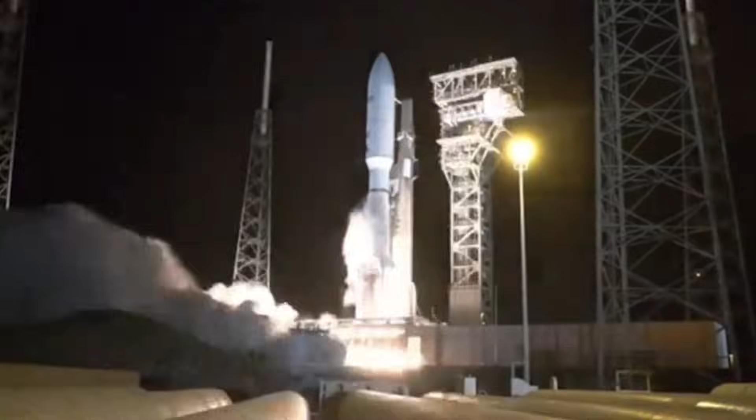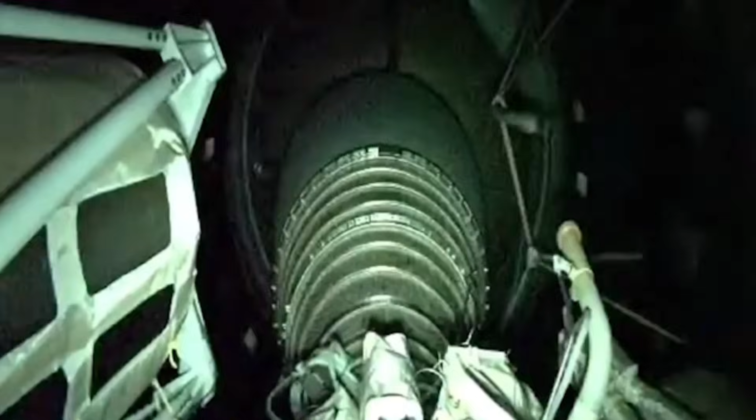Watch this rocket launch. That's an Atlas V, America's most reliable launch vehicle. It's carried Mars rovers, military satellites, and billion-dollar payloads into orbit. Now look closer. Look at the base. That engine, the one doing all the work, wasn't built in America.

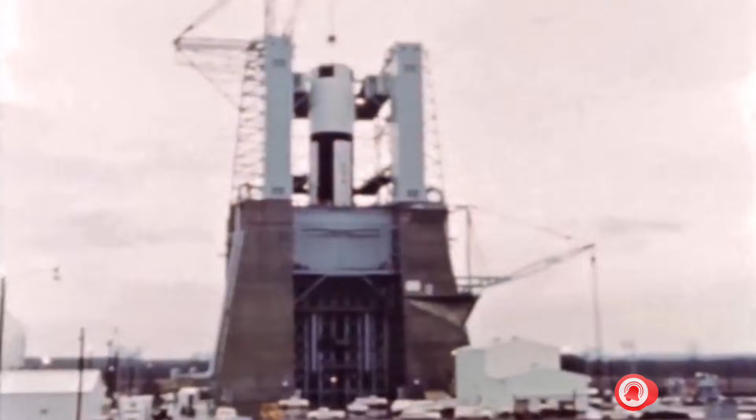It was built in Russia, the RD-180, designed by engineers who spent the Cold War trying to beat us to the moon. And now we buy them, not because Russian engines are cheaper, not because of some trade deal. We buy them because America, the nation that built the Saturn V, the nation that landed on the moon, forgot how to build rocket engines this powerful.

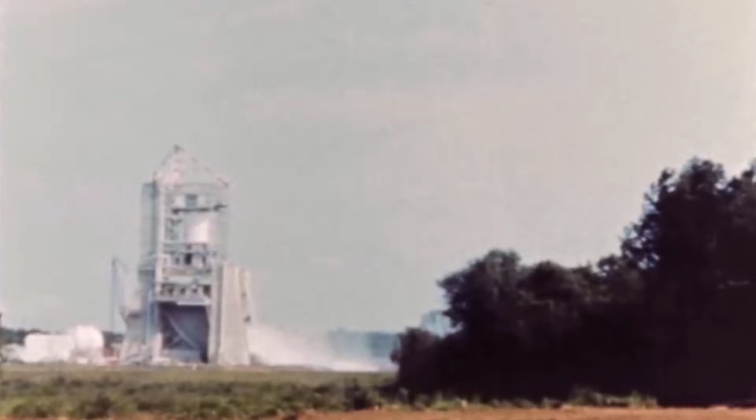The F-1 engine generated 1.5 million pounds of thrust. It flew 65 times without a single failure. It was the most reliable large rocket engine ever built. Today, 3 of them sit in museums.

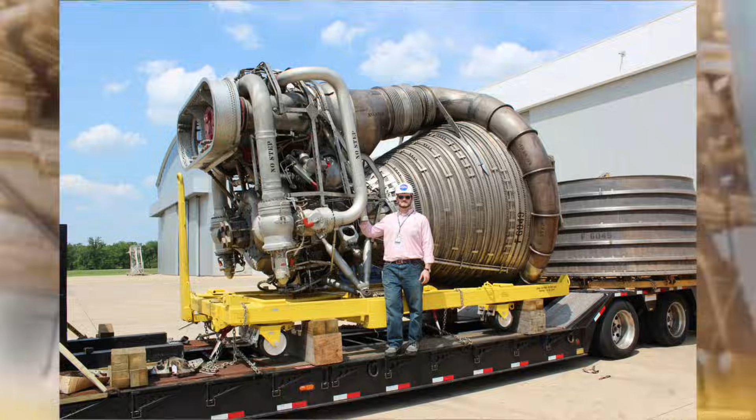We can't rebuild them. The RD-170 generates 1.77 million pounds of thrust. It's the most powerful liquid rocket engine ever fired, and it's still flying. Its descendants power American rockets right now as you watch this.

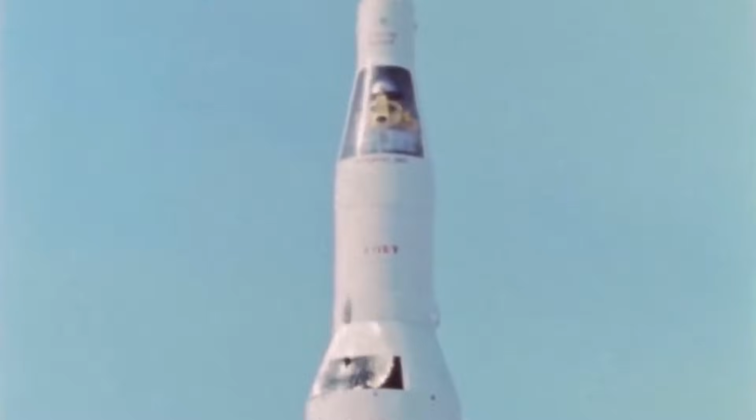Here's what should make you furious. We didn't lose this technology in a war. We didn't have it stolen. We just stopped. We let the engineers retire. We let the documents gather dust. We let the knowledge die. And when we needed powerful engines again, we had to call Moscow.

This is the story of how America built the greatest rocket engine in history, then forgot how it worked, and how our Cold War enemy kept building while we dismantled everything.

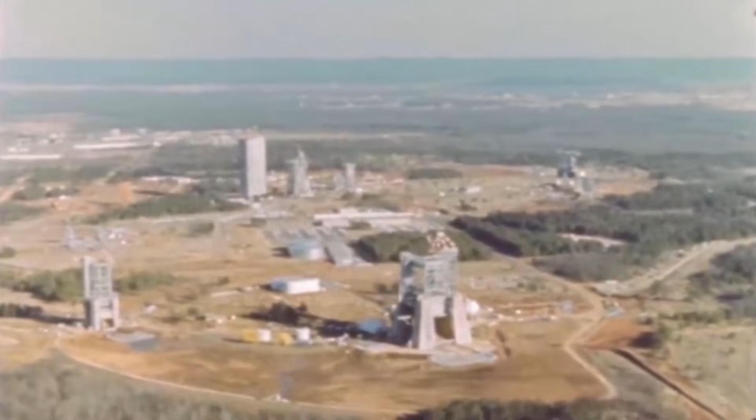To understand what we lost, you need to understand what the F-1 actually was. It wasn't just a rocket engine. It was an engineering achievement that pushed the absolute limits of 1960s technology and human intuition.

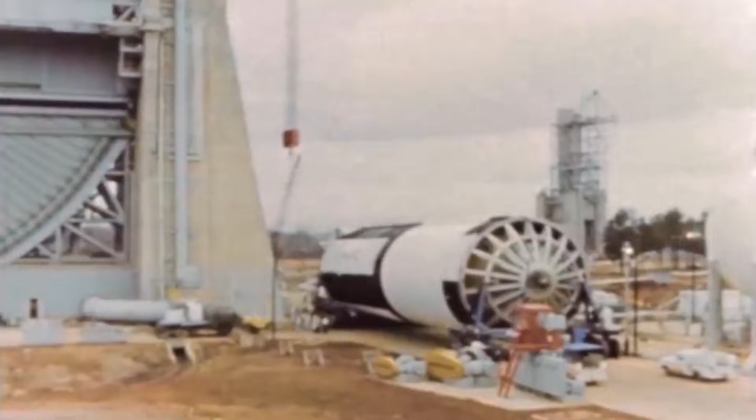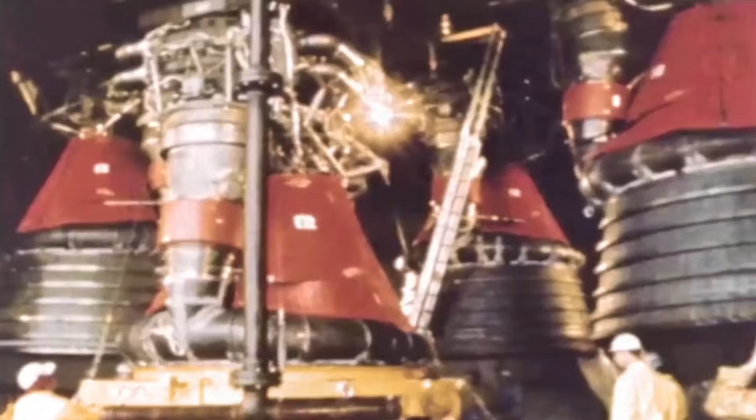1.5 million pounds of thrust per engine. 5 engines on the Saturn V first stage, generating 7.5 million pounds of combined thrust. Fuel consumption was 3 tons per second. That's a backyard swimming pool's worth of kerosene and liquid oxygen every 15 seconds, converted into controlled violence.

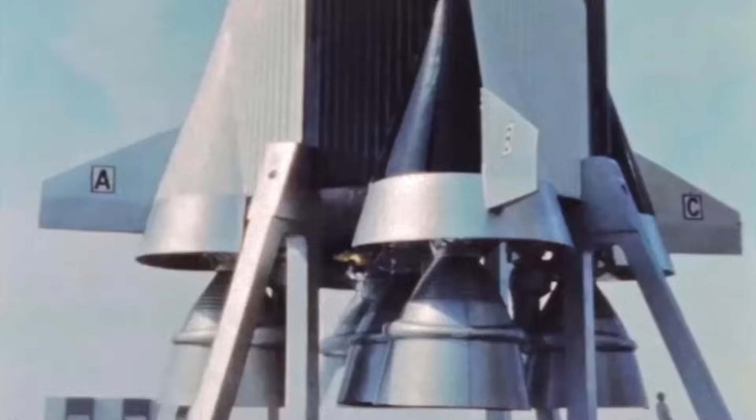But the numbers don't capture the real challenge. The problem that nearly killed the F-1 program was combustion instability. Inside the combustion chamber, at pressures exceeding 1,000 pounds per square inch, the burning propellant would oscillate at frequencies around 2,000 cycles per second. These oscillations would build on themselves, creating standing waves that could tear the engine apart in milliseconds. During early tests, combustion chambers literally exploded on the test stand.

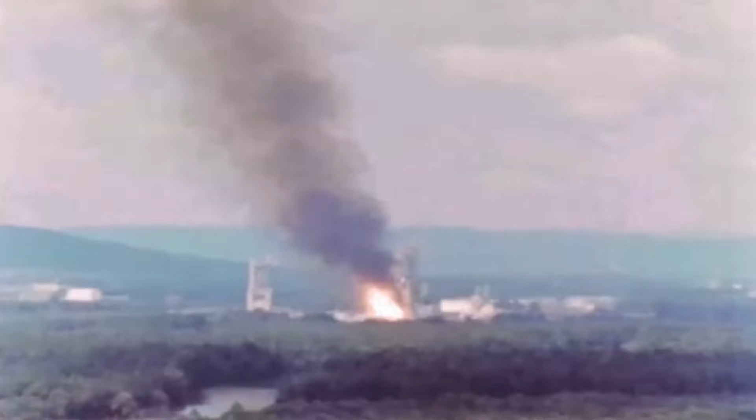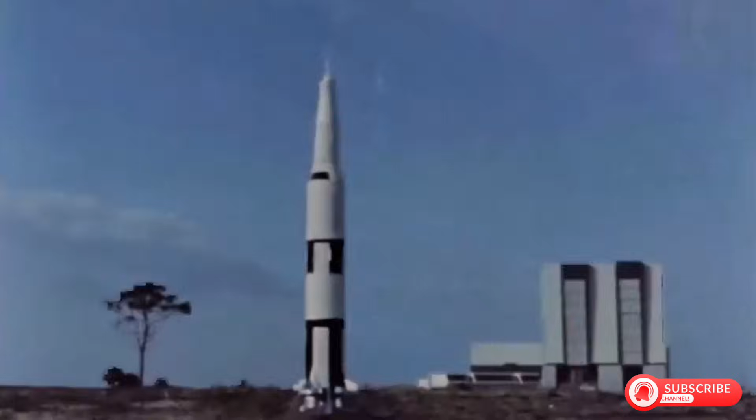Rocketdyne engineers spent years solving this problem, over 2,000 test firings. They tried different injector patterns, different chamber geometries, and different fuel mixture ratios. This wasn't elegant physics. This was brute force trial and error. They'd make a change, fire the engine, and see if it exploded. If it didn't explode, they'd try to understand why.

Eventually, they developed solutions, baffles in the injector face, specific hole patterns that disrupted the formation of standing waves. But here's the critical detail. Much of this knowledge was never fully documented.

Experienced technicians could diagnose combustion instability problems by sound alone. They could hear the frequency shifts and the harmonic patterns, and they'd know exactly what was wrong. No computer models, no simulation software, just intuition built over years of listening to engines scream. This was the black magic of rocket engineering. The F-1 worked not just because of good design, but because of accumulated human expertise that existed nowhere except in the minds of the people who built it.

Now, consider the Soviet answer. The RD-170, 1.77 million pounds of thrust, the most powerful liquid-fueled rocket engine ever built, and it's still flying today. Valentin Glushko designed it. While America was celebrating the moon landings, Glushko was solving the same combustion instability problems we had faced, but with a different approach.

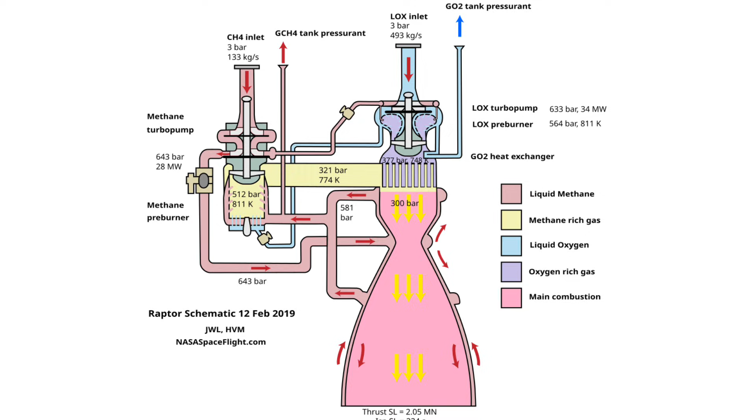Instead of one massive combustion chamber like the F-1, the RD-170 used 4 smaller chambers fed by a single turbopump. Smaller chambers meant shorter acoustic wavelengths, which made instabilities easier to control.

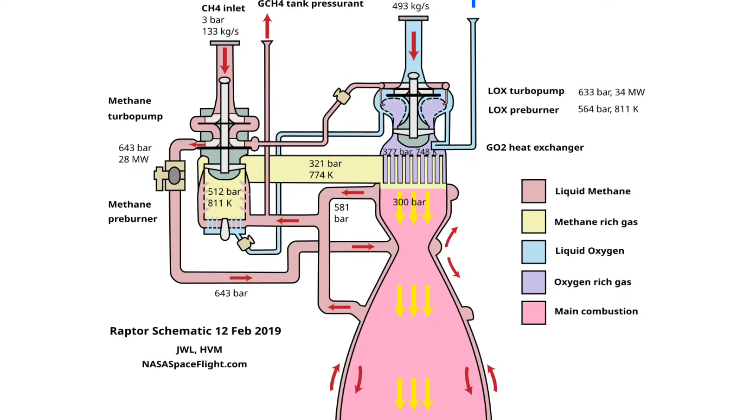But the real innovation was the thermodynamic cycle. The F-1 used a gas generator cycle. A small portion of the propellant gets burned in a separate chamber to drive the turbopump, then exhausted overboard. It's simple and reliable, but inefficient. Only about 65% of the propellant energy converts to thrust.

The RD-170 used staged combustion. All of the propellant flows through the turbopump. The fuel is burned oxygen-rich at extreme pressure to drive the turbine, then injected into the main combustion chamber where it burns again.

Nearly 99% of the propellant energy converts to thrust. It's thermodynamically elegant. It's also viciously difficult to build.

Staged combustion means the turbopump operates at pressures that would make the F-1 engineers weep. One seal failure, one crack in a weld, and superheated oxygen-rich gas finds its way where it shouldn't be. The result isn't a malfunction, it's a detonation.

American engineers tried to develop staged combustion engines in the 1960s. They kept failing. The metallurgy wasn't good enough. The welding techniques weren't precise enough. The seals leaked. So we stayed with gas generator cycles—reliable, proven, and less efficient.

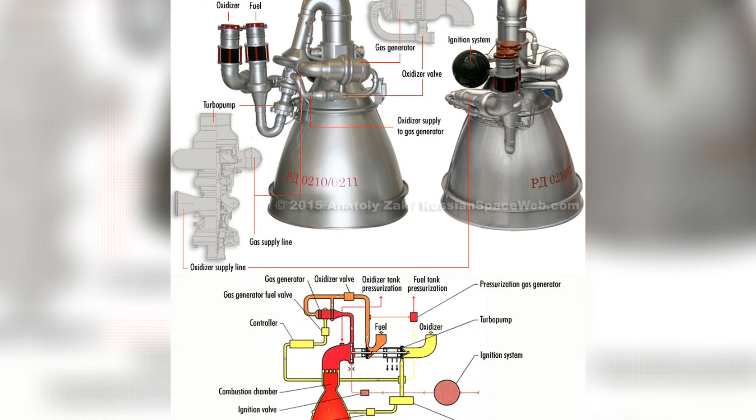The Soviets kept working on it. Their metallurgy improved. Their welding techniques improved. By the 1980s, they had solved problems we had given up on. The irony is profound. We thought we were ahead. We were solving the wrong problem.

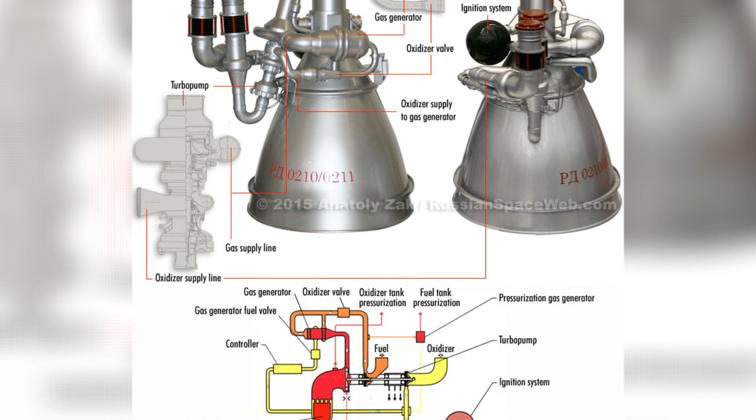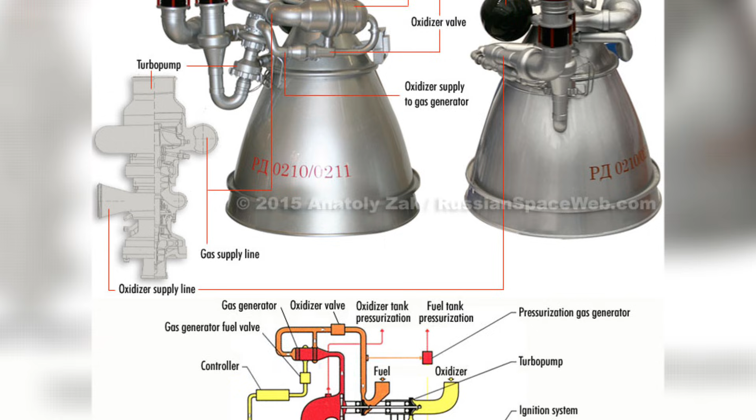The RD-170 first flew in 1985 on the Energia rocket, the Soviet Super Heavy launcher designed to compete with Saturn V. It was 20 years too late to win the moon race, but it proved something important. Soviet engineering hadn't just caught up. In some ways, it had surpassed us. But first, the F-1 had its moment of glory.

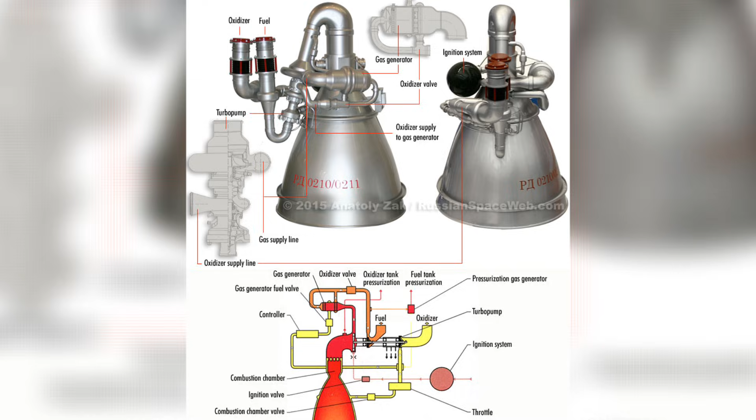July 16, 1969, 5 F-1 engines ignite beneath Apollo 11, 7.5 million pounds of thrust, lifting 6.2 million pounds of rocket. Neil Armstrong's heart rate at liftoff was 110 beats per minute. That's calm for a man sitting on top of a controlled explosion. The engines performed flawlessly for 150 seconds, burning through 4.5 million pounds of propellant before shutting down and separating.

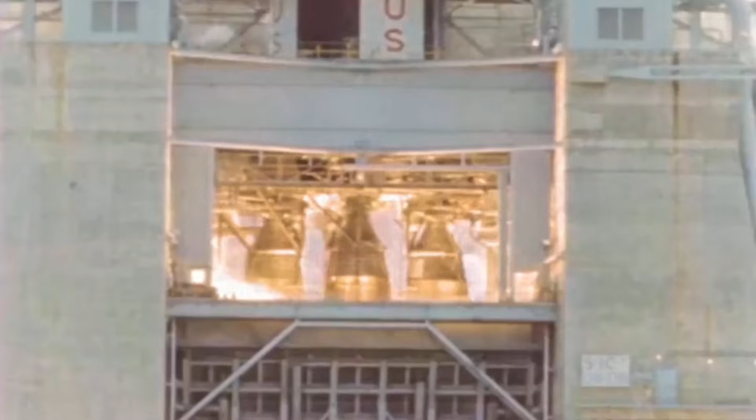The upper stages took over, and 4 days later, Armstrong stepped onto the moon. 65 consecutive flights, 0 engine failures. The F-1 wasn't just powerful, it was reliable in a way that no engine of that scale had ever been. It was the engineering triumph of the 20th century.

16 years later, the RD-170 had its own proving ground. February 1986, the first full-duration test firing at the Baikonur Cosmodrome. Engineers expected problems. New engines always have problems. The RD-170 ran flawlessly. The test was so uneventful that engineers later called it boring.

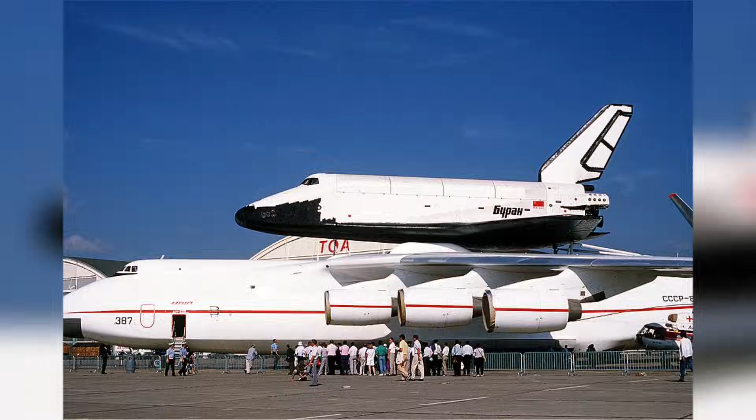In 1988, the Energia rocket launched the Buran spacecraft, the Soviet space shuttle. The RD-170 engines on the strap-on boosters performed perfectly. Buran completed an unmanned, fully automated orbital flight and landing. The Soviets had proven they could match Saturn V capability. It was 2 decades late, but they had done it.

And then, both nations threw it all away. But only one of them recovered.

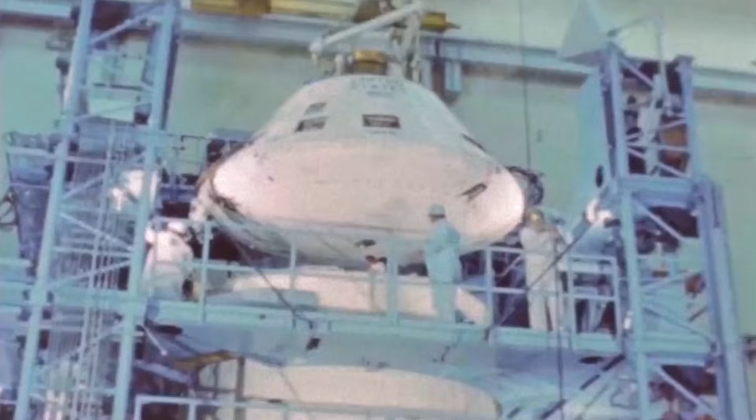Apollo ended in 1972. The last Saturn V launched Skylab in 1973. Production stopped, the assembly lines shut down. Rocketdyne engineers were reassigned, retired, and laid off. The institutional knowledge began to evaporate.

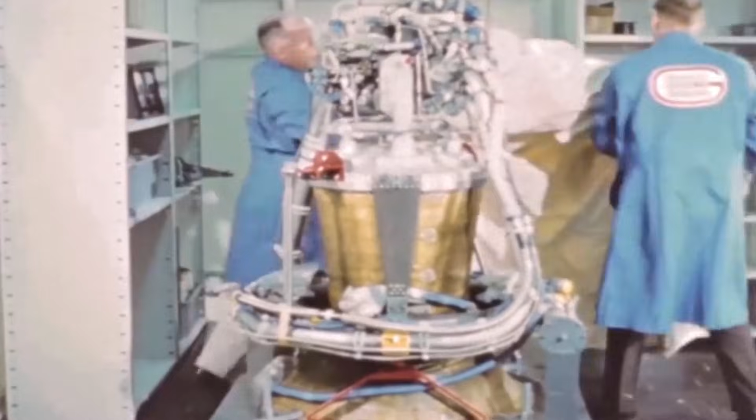The documentation was complete. Thousands of pages of blueprints, specifications, and test reports. NASA assumed this was enough. If we ever needed to build F-1 engines again, we had the plans. We could just start manufacturing. This assumption was catastrophically wrong.

In 2013, NASA launched an effort to study the F-1 for potential use in the Space Launch System. Engineers brought out the old blueprints. They examined the museum artifacts. They interviewed the few surviving engineers who had worked on the original program. And they discovered something terrifying.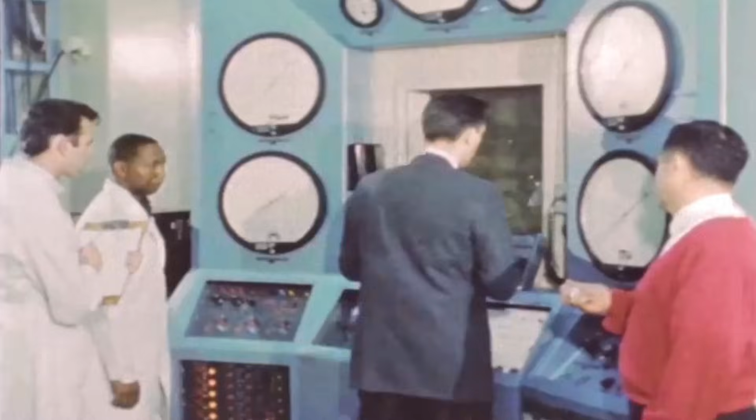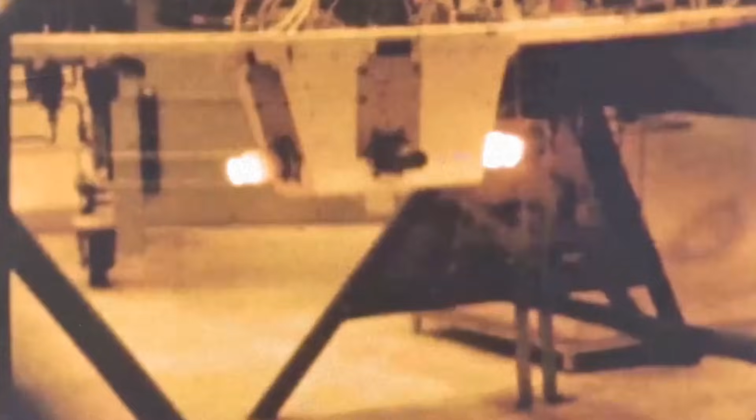The documentation was incomplete. Not in the sense that pages were missing, but in the sense that documentation can never capture tacit knowledge. The blueprints showed dimensions and materials, but not the reasoning behind the decisions. Weld techniques were referenced but not explained. Material specifications were ambiguous. Tolerances that felt right to 1960s machinists were impossible to replicate with modern techniques.

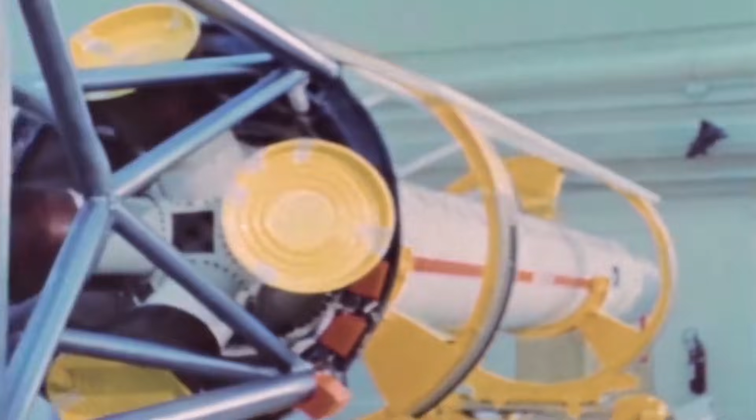One engineer summarized it perfectly: "We have the blueprints, but we don't have the understanding." The F-1 wasn't just a design. It was a living body of knowledge, carried in the hands and minds of the people who built it.

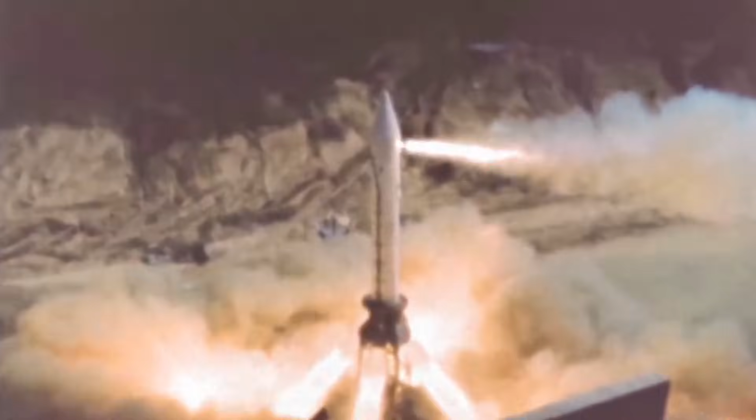Recipes don't make you a chef. Blueprints don't make you a rocket engineer. And by 2013, the people who knew were dead or in nursing homes. We had built the most reliable large rocket engine in history, and then we forgot how it worked.

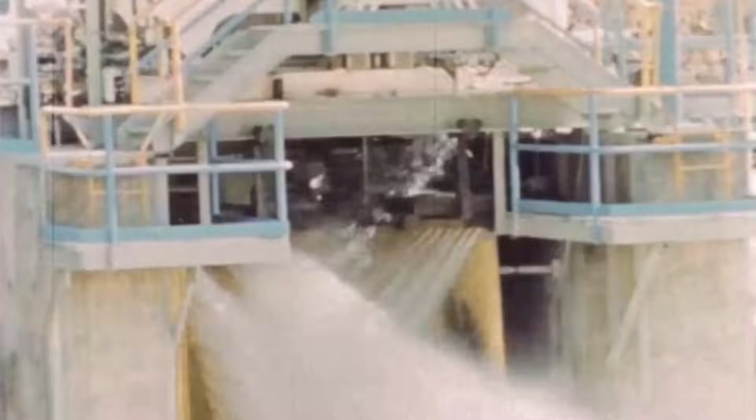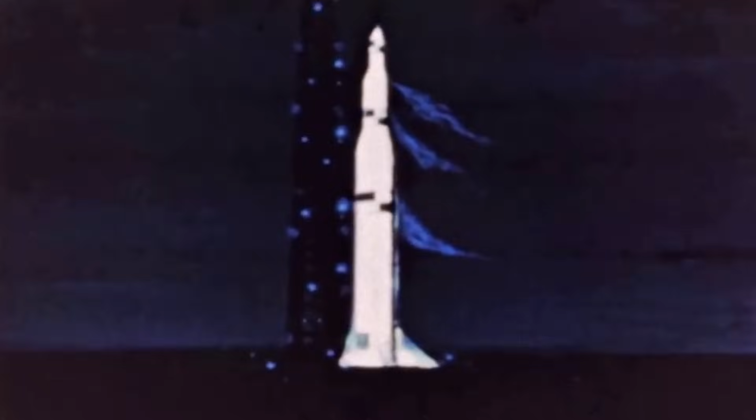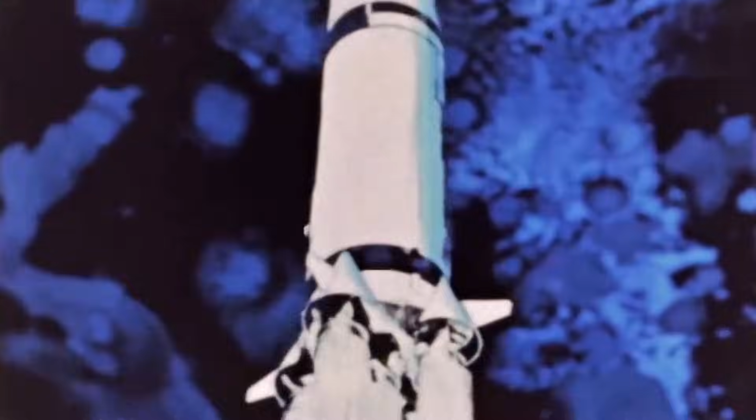Meanwhile, in Russia, something different happened. The Soviet Union collapsed in 1991. The economy disintegrated. Funding for space programs evaporated. But NPO Energomash, the bureau that built the RD-170, kept the production line warm. Engineers stayed employed. They weren't well paid. They weren't working on glamorous new projects. But they were employed. The knowledge transferred to the next generation.

Older engineers trained younger ones. The tacit knowledge, the intuition, the black magic, it all survived.

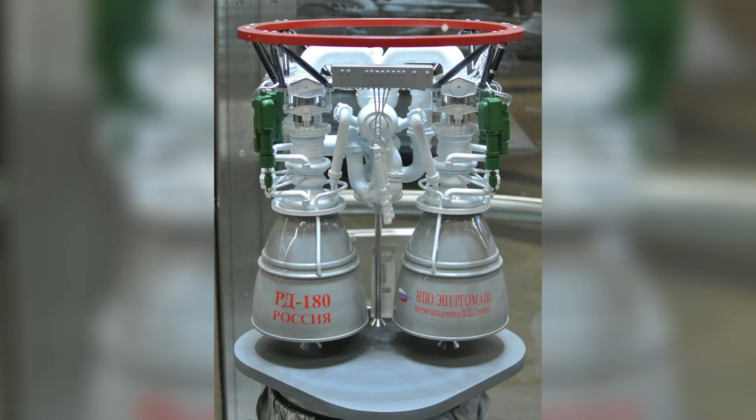The RD-170 evolved. The RD-171, an improved version. The RD-180, a two-chamber export variant. The RD-191, a single-chamber engine. Each iteration refined the design, but the core knowledge remained intact.

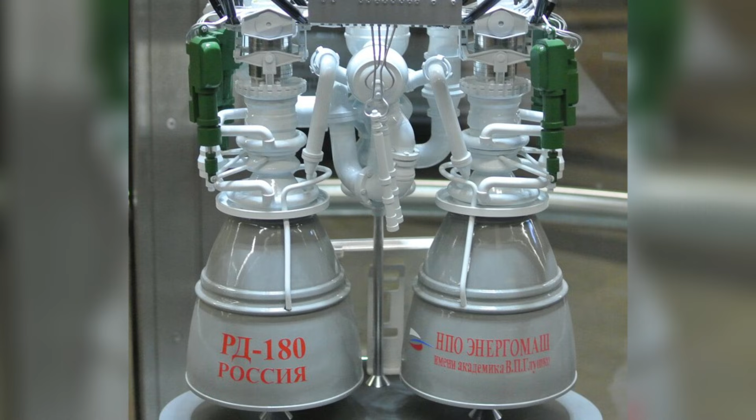By the late 1990s, Russian rocket engineers were broke and demoralized, working in crumbling facilities. But they were still building the most advanced rocket engines in the world, and then came the humiliation.

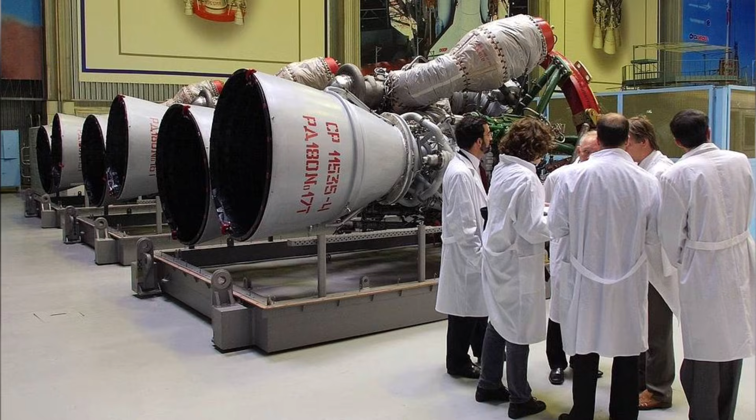In the 1990s, Lockheed Martin needed an engine for the Atlas III rocket. The American options were inadequate. Nothing was powerful enough. Developing a new engine would take over a decade and cost billions.

So Lockheed looked elsewhere. In 1996, they signed a deal with NPO Energomash, the RD-180, 860,000 pounds of thrust, staged combustion cycle, Russian-built and American-financed.

The first Atlas III launched with an RD-180 in May 2000. American rockets with Russian engines. The same engineers whose predecessors tried to beat us to the moon now powered our military satellites, our planetary missions, and our national security infrastructure.

For years, this arrangement was quietly accepted. The RD-180 was reliable, cost-effective, and available. We'd become dependent on it.

Then, in 2014, Russia invaded Crimea. Congress panicked. Suddenly, the fact that American space access depended on Russian engines became a national security crisis. There was a scramble to find alternatives and to restart domestic engine production.

But it was too late to rebuild quickly. The knowledge gap was too wide. The industrial base had atrophied. We had beaten ourselves. Consider the alternate timeline.

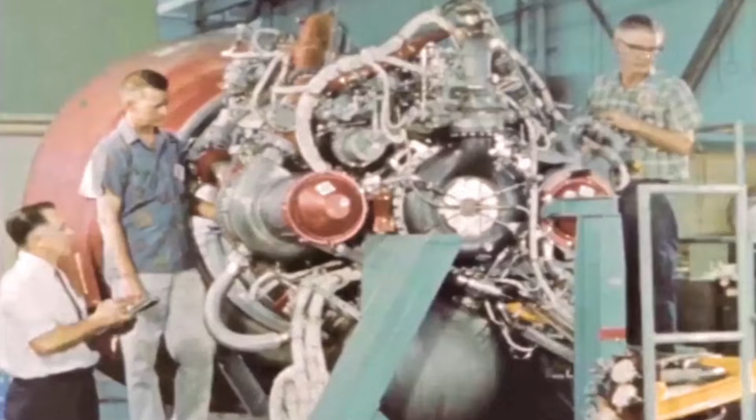What if Saturn V production had continued? What if the institutional knowledge had been preserved? In the 1970s, NASA studied the F-1A, an upgraded version generating 1.8 million pounds of thrust. It was feasible. The technology was mature.

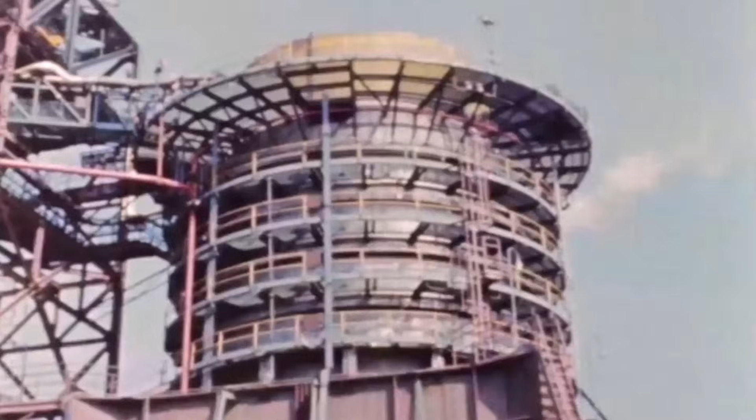It was canceled. What if we had pursued staged combustion in the 1970s instead of abandoning it? We could have developed an American equivalent to the RD-170 by 1985.

That would have meant cheaper access to orbit, larger space stations, and Mars missions in the 1990s. Instead, we had a 30-year gap.

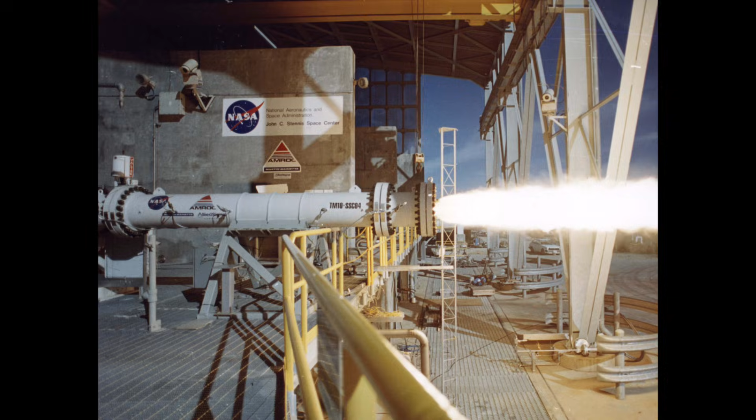A generation of engineers who never built large engines. A knowledge extinction event. The astronauts who never flew. The missions never launched. The future we could have had, traded for short-term budget savings and bureaucratic inertia.

We didn't lose to Russia. We beat ourselves. But the story doesn't end in failure. There's a resurrection underway, though it took 3 decades.

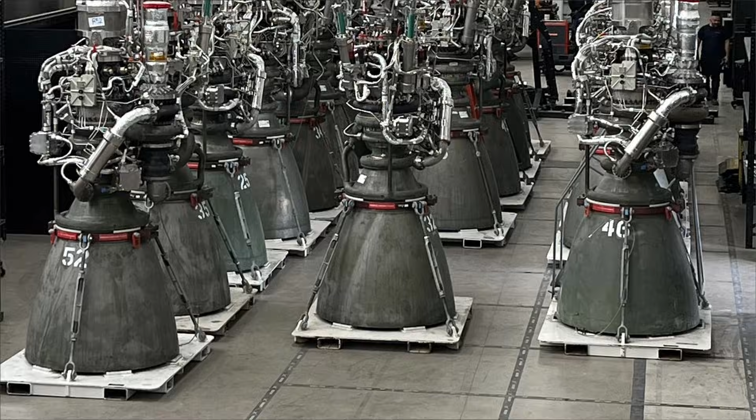SpaceX developed the Raptor engine, full-flow staged combustion, even more thermodynamically advanced than the RD-170. 500,000 pounds of thrust per engine and climbing with each iteration.

Elon Musk studied the RD-170 closely. He learned from Soviet engineering and from their willingness to pursue difficult solutions.

Blue Origin developed the BE-4, American-built oxygen-rich staged combustion, designed to replace the RD-180 on the Vulcan rocket.

The first BE-4 flew in 2024. It took 30 years, but America is finally rebuilding the knowledge we lost.

But here's the lesson we must not forget. The F-1 wasn't killed by budget cuts. It was killed by assumption.

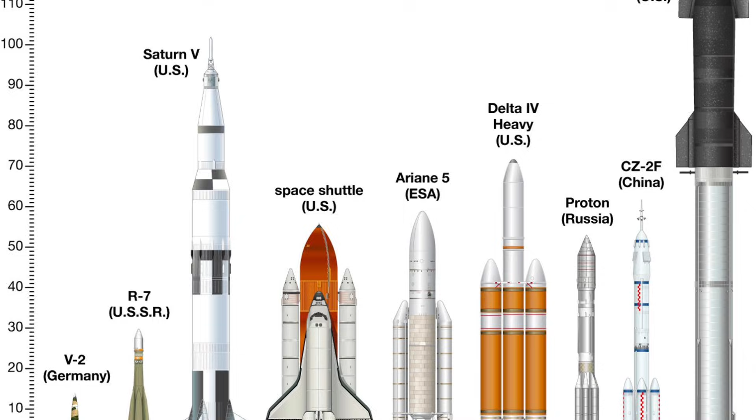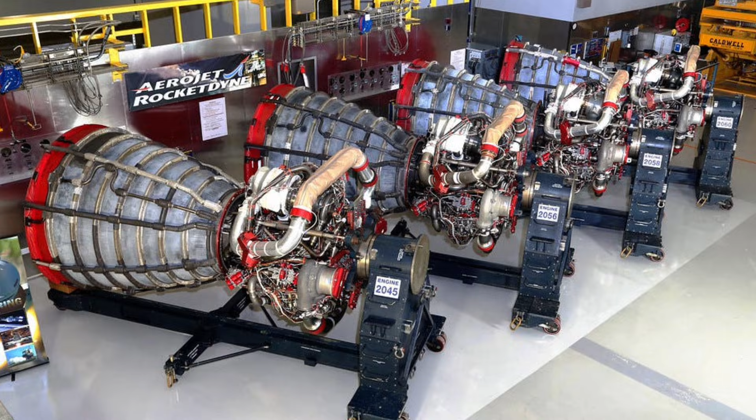We assumed the knowledge would always be there. We assumed we could rebuild whenever we wanted. We assumed documentation was enough. We assumed wrong. 3 F-1 engines sit in museums: the Smithsonian, the Kennedy Space Center, the Johnson Space Center.

Visitors walk past them, take photos, and marvel at their size. But these aren't monuments to triumph. They're monuments to forgetting. The RD-180 still flies, because Russia never assumed they could afford to forget.

They kept the engineers employed. They kept the production lines open. They preserved the knowledge, even when they could barely afford to eat.

We went to the moon with engines we can't rebuild. We launched satellites with engines we had to buy from our enemies.

The question isn't whether we can recover. We are recovering. SpaceX and Blue Origin prove that.

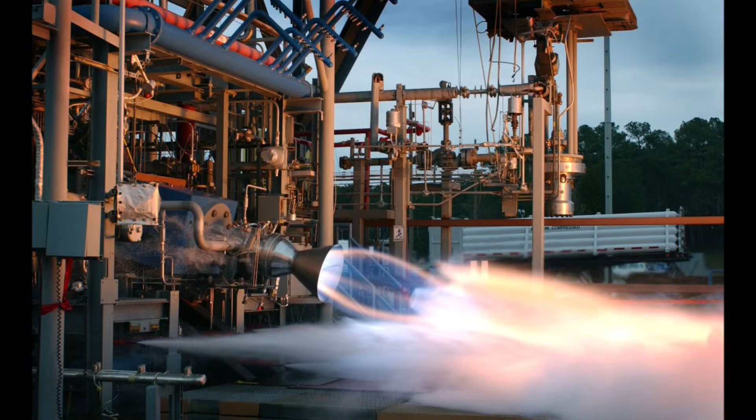The question is whether we'll remember this lesson or repeat it, whether the next generation of engineers will preserve what they build or assume it can always be recreated later, whether we'll value institutional knowledge or treat it as disposable.

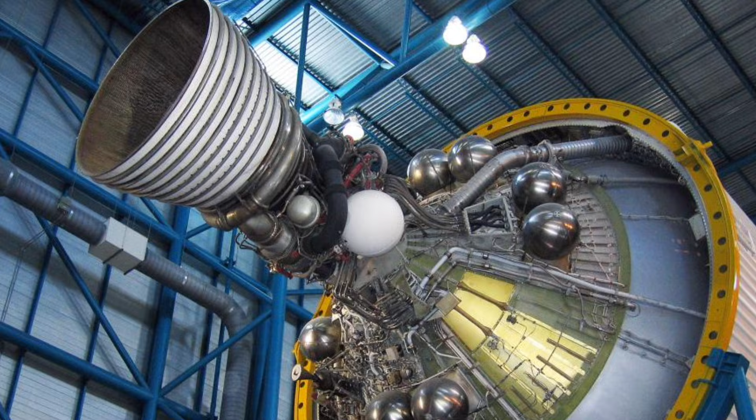The F-1 proved what America could build. The RD-180 proved what America forgot. And somewhere in a museum, the most reliable rocket engine ever made is gathering dust because no one alive remembers how it worked.